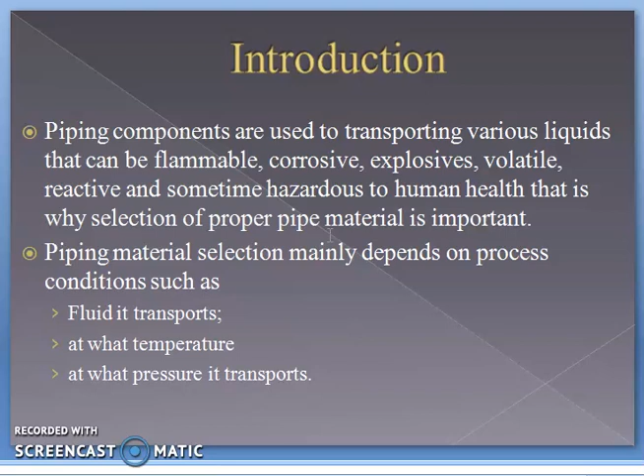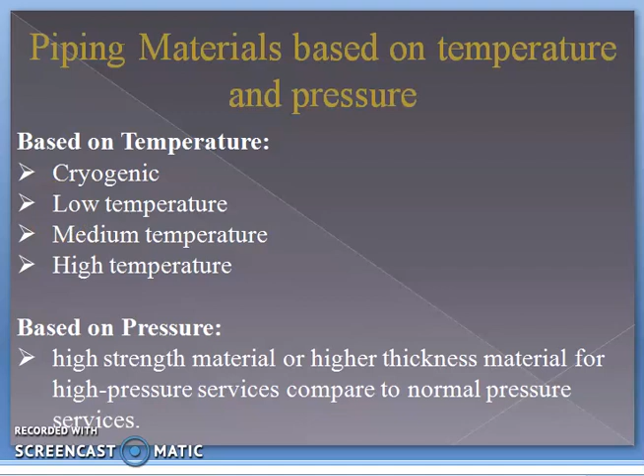Based on pressure, it is obvious that high strength material is selected for high pressure services compared to normal pressure services. Next point we have to consider is factors affecting the selection of piping materials.

First one would be mechanical properties: tensile stress, yield stress, creep, rupture, fatigue, and impact are such mechanical properties that affect the selection of piping material.

Next is performance requirement, that is weldability, machinability, etc. Next is material reliability. We should rely on that material for a particular servicing condition so that there should be no mishaps in future.

Next is economic factors like cost of material. Next is environmental conditions and availability, resistance to corrosion and erosion, and last one is safety. Though safety is mentioned last, we have to consider and focus on safety first.

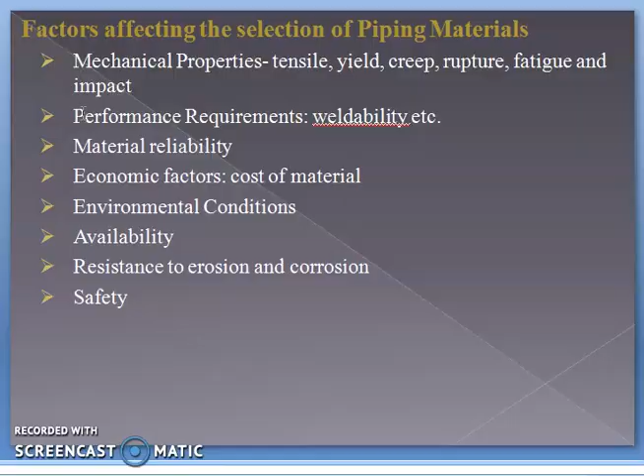In metallic, it is further classified as ferrous and non-ferrous metals. In ferrous, there is cast iron, carbon steel, alloy steel, stainless steel, and other special alloys. Whereas in non-ferrous, it includes copper and its alloys, aluminum and its alloys, nickel and its alloys, and last one is lead and its alloys.

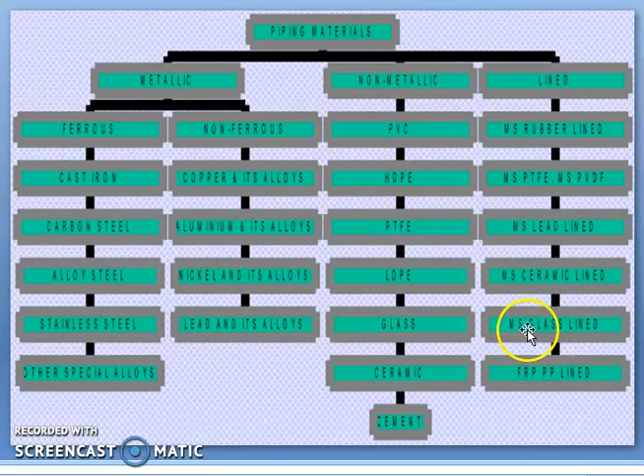On the other hand, non-metallic materials like PVC, HDPE, PTFE, LDPE, glass, ceramic, and cement piping material can be used. And in lined, we have MS rubber lined, MS PTFE, and PVDF, MS lead lined piping material, ceramic lined, and MS glass lined, mild steel glass lined. Here, MS means mild steel glass lined and FRP PP lined. So these are the piping materials that can be used.

So first of all we will discuss ferrous materials. First is carbon steel. It is an alloy of iron and carbon and generally contains 0.1 to 1.5% of carbon.

Based on carbon content, it is further classified as mild steel, where carbon ranges from 0.05% to 0.30%. Next is medium carbon steel, where carbon content is from 0.30% to 0.70%. And last one is high carbon steel, where carbon ranges from 0.70% to 1.5%.

Carbon steel can withstand a temperature of 450 degrees Celsius. General chemical composition of carbon steel is: carbon ranging from 0.07 to 1.56%, manganese 1.6%, silicon 0.6%, sulfur 0.1%, and phosphorus 0.1%.

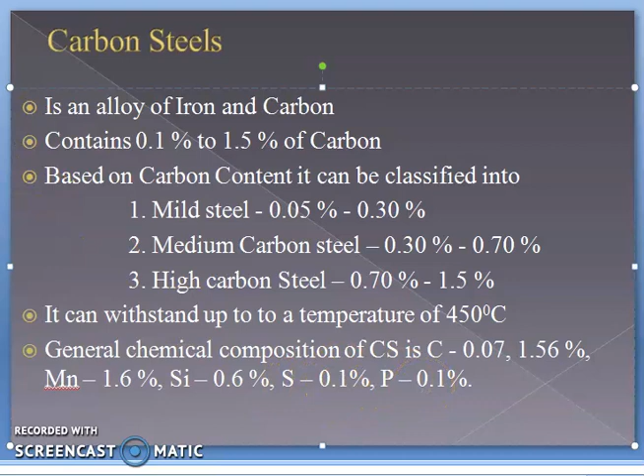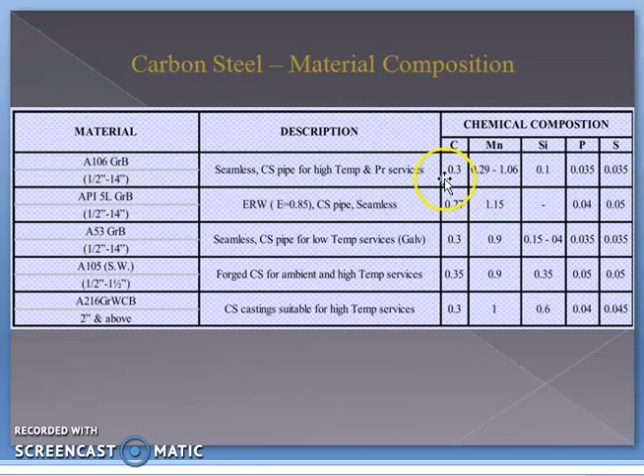Next material we are going to discuss is alloy steel. Addition of alloy elements to improve the characteristic of the material is termed as alloy steel. Commonly used alloying elements are silicon, chromium, nickel, molybdenum, manganese, vanadium, titanium, boron, aluminum, cobalt and tungsten.

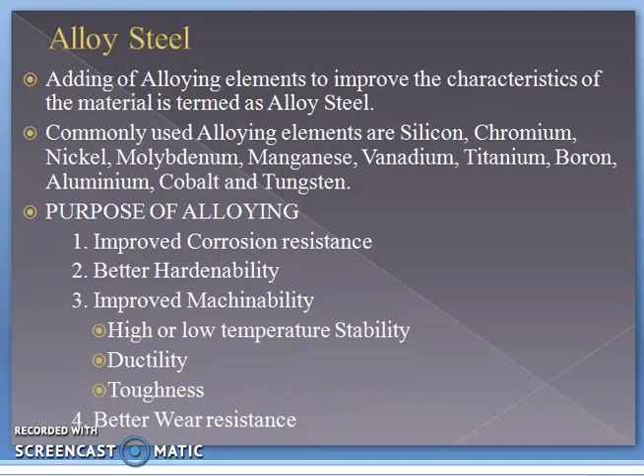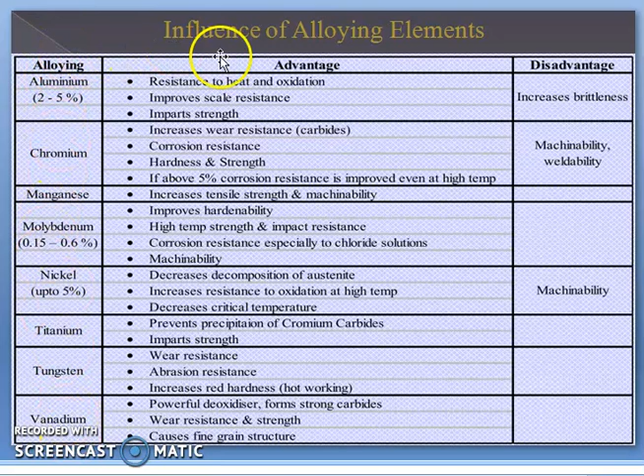We alloy to improve corrosion resistance, better hardenability, improved machinability, to withstand high or low temperature, stability, ductility, toughness, etc., and last one is to increase wear resistance. Considering alloy steel, different alloying elements are mentioned in this column, and their advantages and disadvantages are mentioned in this table.

Aluminum can be added from 2 to 5% while alloying. Advantages of aluminum: it increases resistance to heat and oxidation, improves scale resistance, and imparts strength. Whereas disadvantage: it increases the brittleness of the material.

Next alloying medium is chromium. It increases wear resistance, corrosion resistance, and hardness and strength would be increased. If above 5%, the corrosion resistance is improved even at higher temperatures. Disadvantage with higher chromium percentage is poor machinability and poor weldability.

Next is manganese. It increases tensile strength and machinability. Molybdenum can be added from 0.15 to 0.6%. It improves hardenability, high temperature strength and impact resistance, corrosion resistance especially to chloride solutions, and machinability would be greater.

If we consider nickel, we can add up to 5%. It decreases the decomposition of austenite. It increases the resistance to oxidation at higher temperatures. It decreases critical temperature. And as a disadvantage, it causes poor machinability.

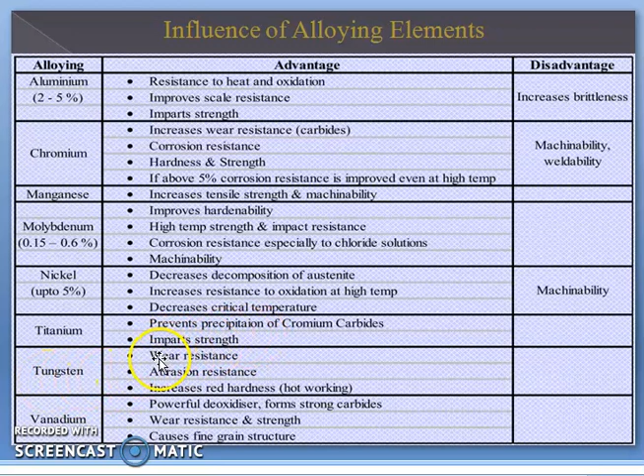Titanium prevents precipitation of chromium carbides and imparts strength to the material. Tungsten increases wear resistance, abrasion resistance, and red hardness for hot working. Vanadium increases wear resistance and strength. It is a powerful deoxidizer, forms strong carbides, and causes fine grain structure.

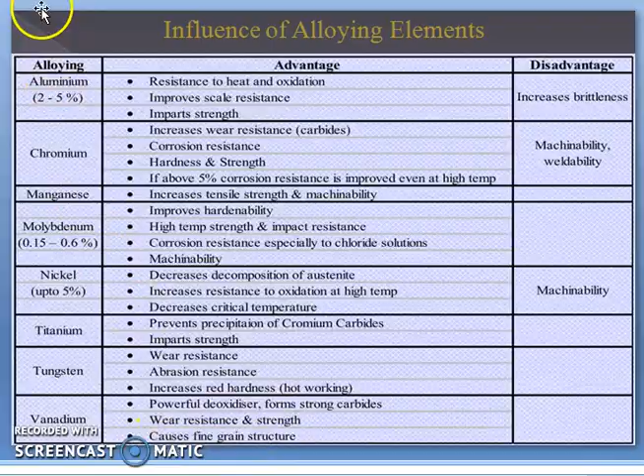Stainless steel can be obtained by adding 11.5% or greater percentage of chromium in iron. It changes the microstructure, and based on these microstructures, its varieties can be obtained. Stainless steel possesses a greater percentage of chromium, which forms a chromium oxide film exposed to air that prevents chemical attack of moist air on the material surface, giving higher corrosion resistance.

Nickel retains the austenitic structure of the steel, giving greater resistance to corrosion than all types of steels. Stainless steel is further classified into three types based on microstructure: austenitic stainless steel, ferritic stainless steel, and martensitic stainless steel.

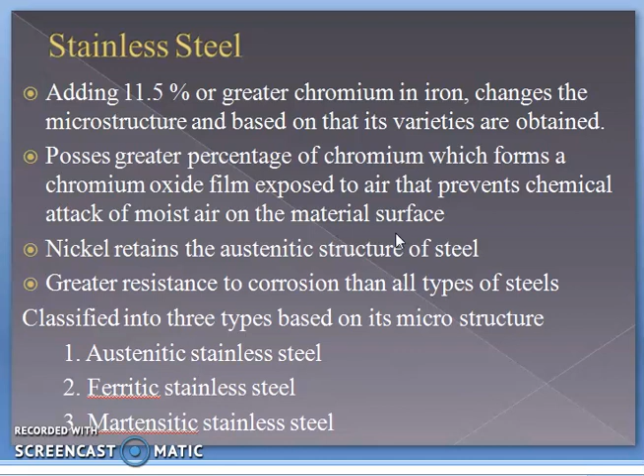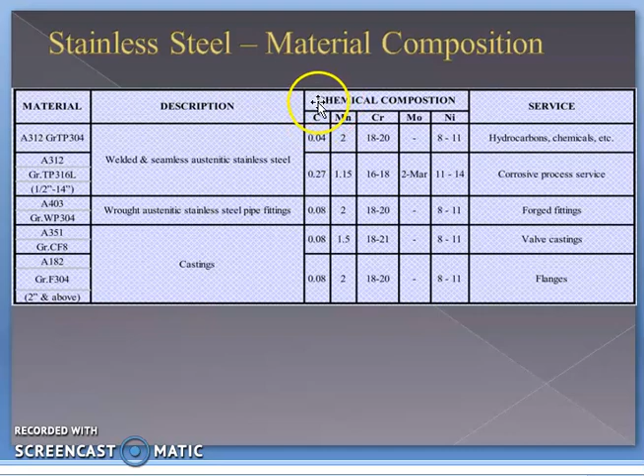This table shows the stainless steel and its material composition. Material is mentioned in this column, description is given in the second column, next we have chemical composition, and the last column is the service.

Next is non-ferrous material, starting with copper and its alloys. It is used when heat and electric conductivity are important in piping systems, as thermal conductivity of these alloys is high. These alloys consist of brasses, bronzes and cupronickel alloys.

Up to 20% zinc in brass gives good corrosion resistance. Bronze displays good strength as well as corrosion resistance. Cupronickel has the highest corrosion resistance among copper alloys and is used for heat exchanger tubing.

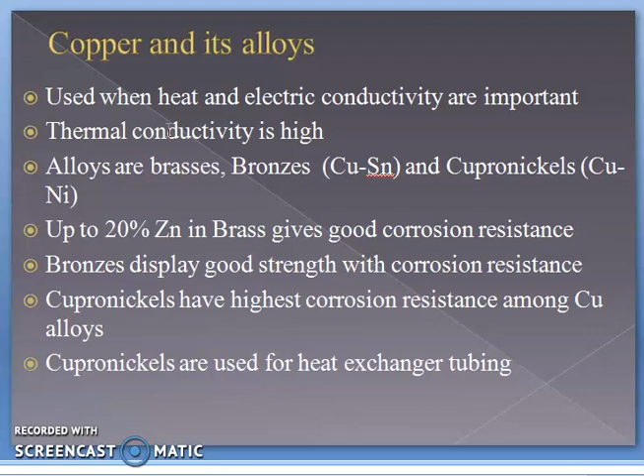Next material is nickel and its alloys. Nickel and its alloys have easy machinability and weldability. Chloromet and Hastelloy are widely used, other than Monel 400. Nickel and its alloys are not resistant to oxidizing environments.

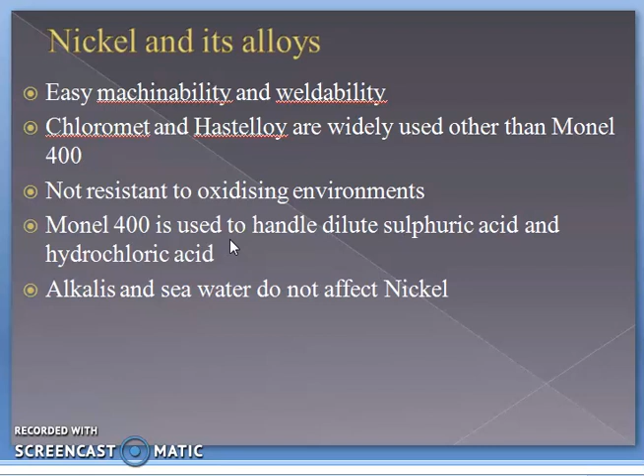Monel 400 is used to handle dilute sulfuric acid and hydrochloric acid. It is also used in alkalis and seawater handling systems.

Next metal is aluminum and its alloys. They have good thermal conductivity and are supposed to be the most workable metal among all the metals and alloys available. They are highly resistant to atmospheric conditions, industrial fumes, and fresh, brackish or salt water.

Aluminum and its alloys are not resistant to corrosion. They lose strength rapidly at and above 175 degrees Celsius.

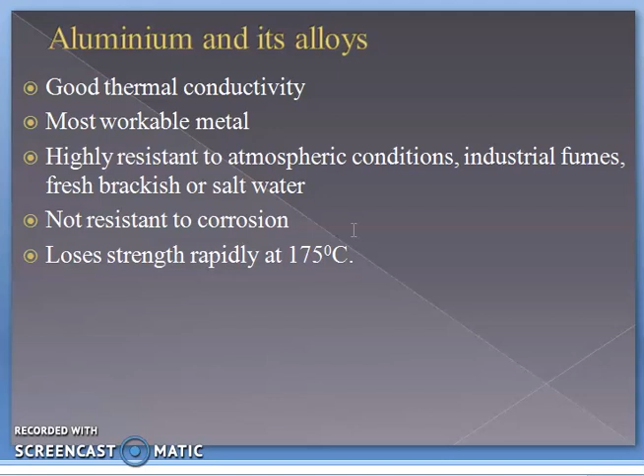Next material we are going to discuss is titanium. Titanium is strong and of medium weight. Titanium oxide is formed which prevents corrosion, giving resistance to nitric acid of all concentrations except fuming nitric acid.

Welding of titanium requires an inert atmosphere. It loses its strength above 400 degrees Celsius. It provides good resistance to hydrochloric acid when alloyed with 30% molybdenum. Titanium is not affected by impingement and crevice corrosion.

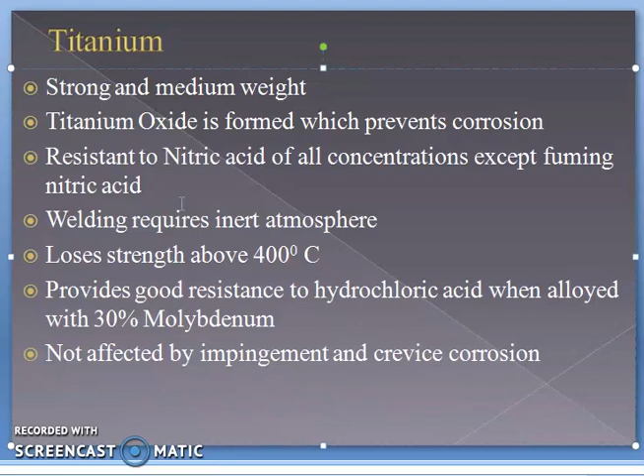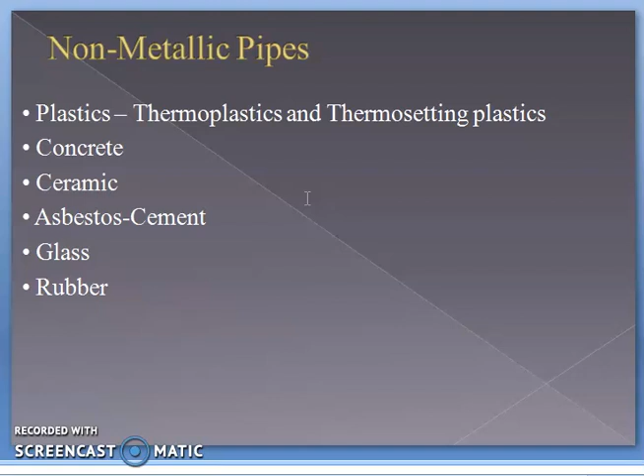Next material we are going to discuss is non-metallic pipes. They mainly consist of plastic, which may be thermoplastic or thermosetting plastic, next concrete, ceramic, asbestos cement, and then glass piping and rubber pipings.

First we will discuss polyvinyl chloride, that is PVC pipe. PVC is tough and exceptionally resistant to chemical attack. It is rigid, unplasticized, and a thermoplastic material. Pipes are manufactured by the extrusion method, while fittings, flanges and valves can also be manufactured by injection molding.

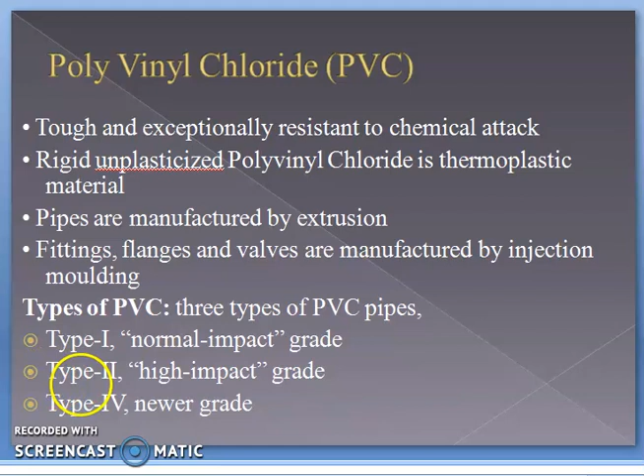Types of PVC are categorized as follows: Type 1 is normal impact grade, Type 2 is high impact grade, and the last one is Type 4, which is the newer grade.

PVC material properties are mentioned in this table, with properties on the extreme left, followed by Type 1, Type 2 and Type 4.

Advantages of PVC pipe: no physical or little deterioration when exposed to direct sunlight, unlike other plastics. It does not support combustion, and no scales are formed over the smooth inside surface.

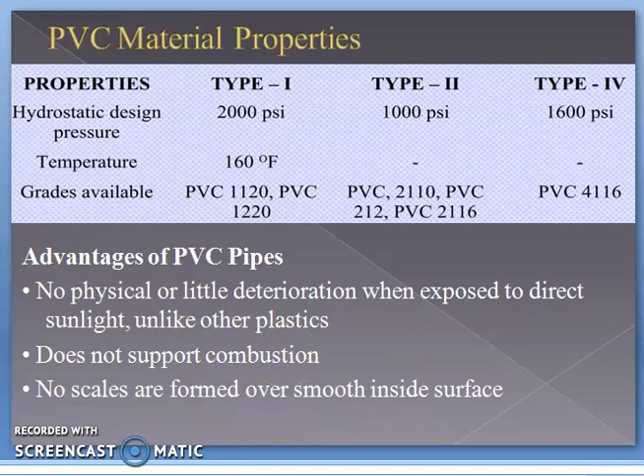Application: it is extensively used in corrosive applications involving acid, alkalis, salt solution, alcohols and many chemicals. In oil fields, it can carry sour crude oil, to which PVC is inert, and paraffin buildup is minimum.

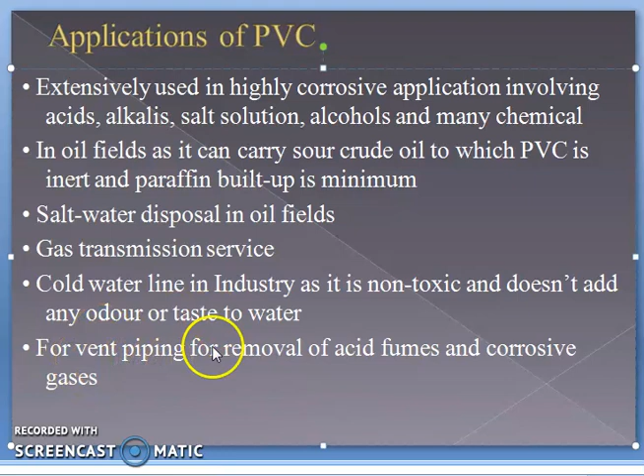PVC can also be used for saltwater disposal in oil fields, and for gas transmission pipelines. It is used for cold water lines in industry, as it is non-toxic and doesn't add any odor or taste to the water. PVC can also be used for vent piping for removal of acid fumes and corrosive gases.